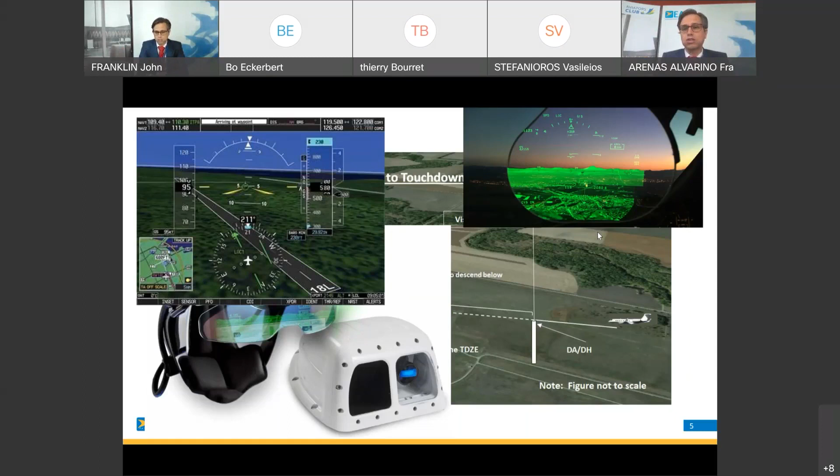But we are receiving applications of new technologies every day, with microwave sensors instead of infrared. We are also receiving a lot of applications regarding synthetic vision systems, etc. So our idea was, in a nutshell, to have in the AWO project a total system approach.

From that moment, we thought it was important to combine in a single rulemaking task all the domains of EASA, starting with air operations, but also piloting and pilot training through our colleagues in flight crew licensing, also aerodrome infrastructure, which plays a significant role in all-weather operations, and finally initial airworthiness certification, which enables the original equipment manufacturers that put that technology into operation.

So again, our idea was to ensure a total system approach. At that time, Marcel Compare, who is now retired and is here, started this project, along with Willie Siegel, and then I took over this project management 3 or 4 years ago, and since then we continue this idea of the total system approach.

That means we changed slightly the approach. Originally, in the current regulatory framework, we had very prescriptive implementing rules with very prescriptive ops rules, in which, for example, the enhanced flight vision system was only crediting one-third of the visibility. Those kinds of rules are being removed and pushed into certification.

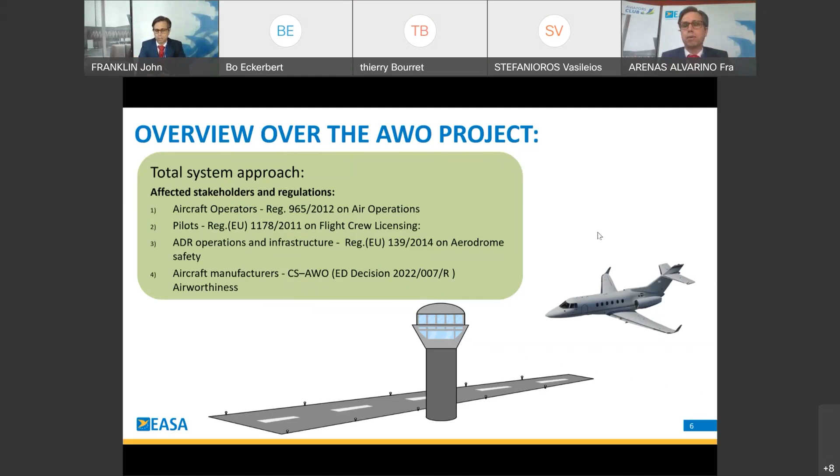At the same time, we do that in the same way with aerodromes, creating a regulatory framework that, on a voluntary basis, allows the aerodrome operator to introduce new technologies, while in ops, again, there's no prescriptive limitation. So the technologies implemented at aerodrome level can automatically be used by the airlines.

So let's talk a little bit more about what we mean by performance-based regulation and total system approach. Performance-based regulation means that the safety objective should be in the implementing rule, and it should be technology neutral, technology agnostic, and the technical requirements should be in the soft law.

Today, you see in the regulation that we have, for example, technology-specific terms like ILS, GLS, or EFVS. All of them are in the implementing rule, and therefore impose a limitation and a prescription in terms of technology.

So the new regulatory framework has no technology description at the implementing rule level, meaning that you will now see in the new regulation the term XLS, which means a landing system that is not bound to a specific technology. And then later on in the AMC, you will see the technology referenced, the ILS, the GLS, the EFVS, etc. Therefore, with this idea in mind, we assess the combination of risk.

For that, you can see in the concept paper of the all-weather operation a very detailed risk assessment that we did together with the concept paper. You can go to the EASA website, look for the 2015 terms of reference, and you will see the concept paper and the idea behind it, with a very detailed risk assessment.

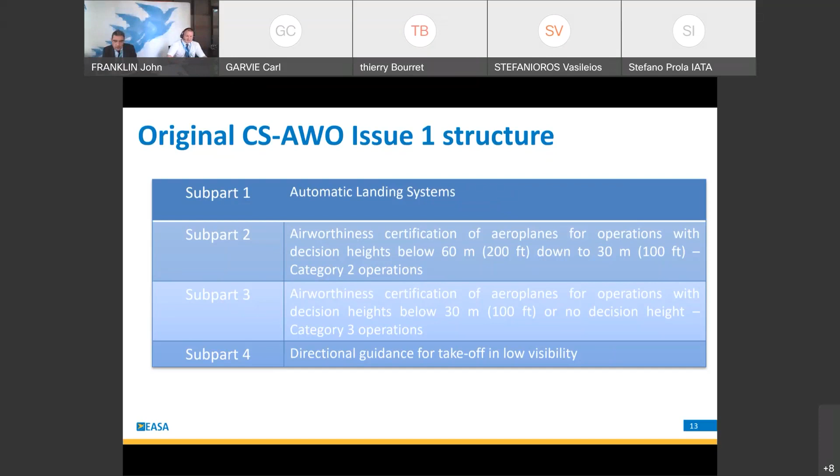As Francesco mentioned, we wanted to be more technology agnostic and allow for updates to technology in the future, so we completely restructured the CS into different subparts. In subpart A, we've extracted all of the technology dependent elements and put them into a subpart which we've called enabling equipment. As technology comes on board, we can update this subpart and add different sections or amend them as necessary. For example, we have the original automatic landing systems, but we've also added HUDs, enhanced flight vision systems, synthetic vision guidance systems, and combined vision systems.

Now in subpart B, you'll see this is where we've put the performance-based elements, so there's no technology focus within subpart B. It provides you the performance requirements for the systems. At section 1 we have Cat 1, section 2 we have SA Cat 1 which is new, section 3 we have Cat 2, section 4 we have Cat 3, and section 5 we have reduced visibility for operational credits.

And in subpart C, we have retained the takeoff operations in low visibility. So you can see in this way, we're able to very dynamically update the CS as new technology comes on board, but retain the performance requirements within subpart B and have the more prescriptive parts in AMC.

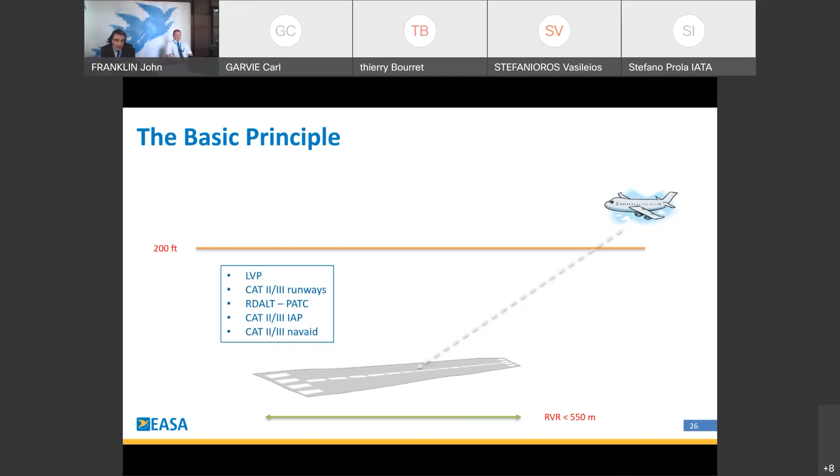There are additional requirements about the radio altimeter, which also requires precision approach terrain charts, Cat 2 instrument approach, Cat 2 or 3 instrument approach procedures, and Cat 2, 3 navigation aids. And this is the basic principle.

Now with the new concept, there is a slight change. The first one is the special authorization Cat 1 approach operation, where you see in the slide that we change the decision height, not anymore 200 feet, but 150 feet. So with the old concept, we are in the area where low visibility procedures are required.

For those familiar with Annex 14 and with the EASA certification specifications, we know that the obstacle-free zone, for example, is a recommendation for Cat 1 runways and is required for Cat 2, Cat 3 runways. So thinking the same way, we said: if we are below 200 feet, then we need an obstacle-free zone. We also need a Cat 1 instrument approach procedure, but the decision height, the OCH, should not be 200 feet, but should be 150 feet because you go further down.

And the ILS - well, this requirement is coming from air operations. So you need to have an unrestricted ILS, which is not offset, with a glide path of 3 degrees, although some deviations are allowed based on assessments conducted by the air operators.

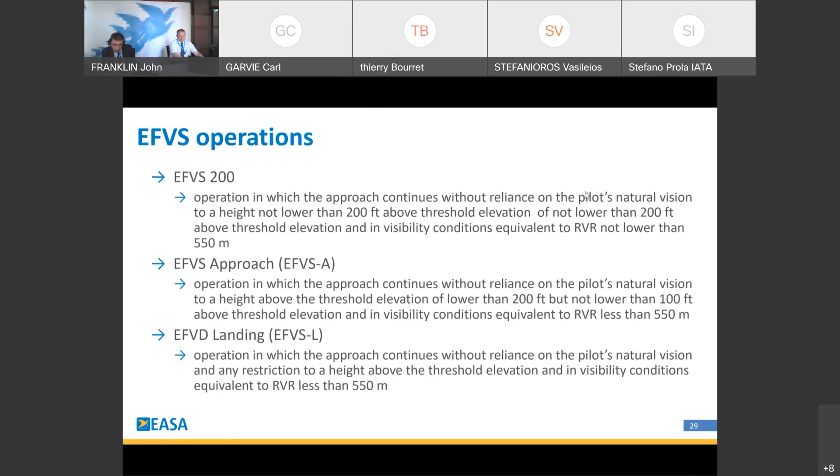And the requirements are, you can see them on the slide.

So for the EFVS 200, you need an instrument approach procedure, which is at least a non-precision approach. So you have only lateral guidance, but you are not allowed to have a final approach track more than a maximum of 3 degrees from the extended center line of the runway. And you need either an obstacle-free zone or the VSS is not penetrated. And of course, an instrument departure procedure is established.

On the EFVS approach, well, we need similar requirements. We need a straight-in instrument approach procedure. Again, the requirements for the obstacle-free zone or the penetration of the visual segment surface. We need touchdown zone RVR, low visibility procedures, because we are going down to below 200 feet, and Cat 2, Cat 3 switchover times.

And to land, it's what we require for the approach, plus that we need the type A chart and a precision approach terrain chart. And these requirements are coming, as I said, from air operations and from the certification.

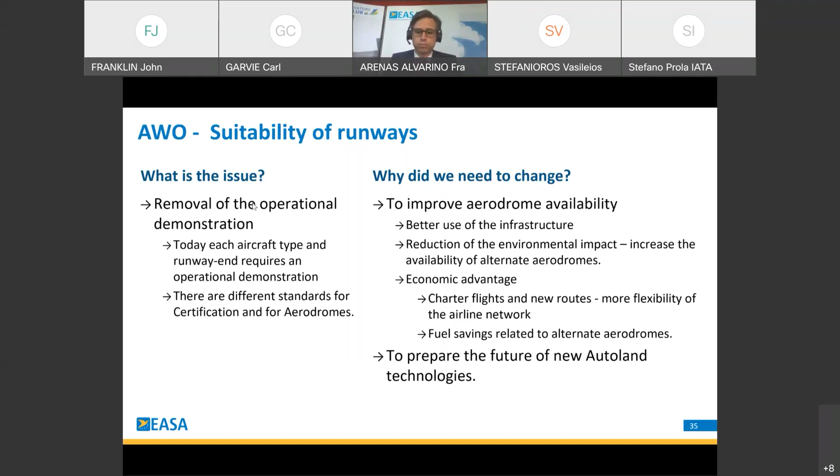So let's go into a little more detail on the suitability of runways. We know that 90% of runways today - we did a study and in Europe it's 95, but let's take a round figure of 90% across the world - the new CS issue 2, and the assumptions of certification in accordance with CS issue 1 and 2, are within that framework. That means we can accept that for 90% of runways, with a documentation check, the airline could operate automatically into that aerodrome. So what are we going to do about the other 10%?

There are several steps, but the first idea is that if you are already operating to an aerodrome and it is safe to operate, you can use that operational data to confirm and credit the fact that you can fly into that aerodrome. So that will be the first case.

If you don't have operational data because it's a new airport, a new route, or a new type certificate, then subject to manufacturer statement, Airbus, Boeing, or Embraer could say that this Airbus is equivalent to that other Airbus, and exchange operational data between models, from a 330 to a 380, from a 330 to a 320, etc. We also allow the use of computer simulations or manufacturer full flight simulators, but fundamentally computer simulations are all under the manufacturer. And then if nothing works, it will be an operational demonstration. We estimate that the operational demonstration with this new regulatory framework will be minimal.

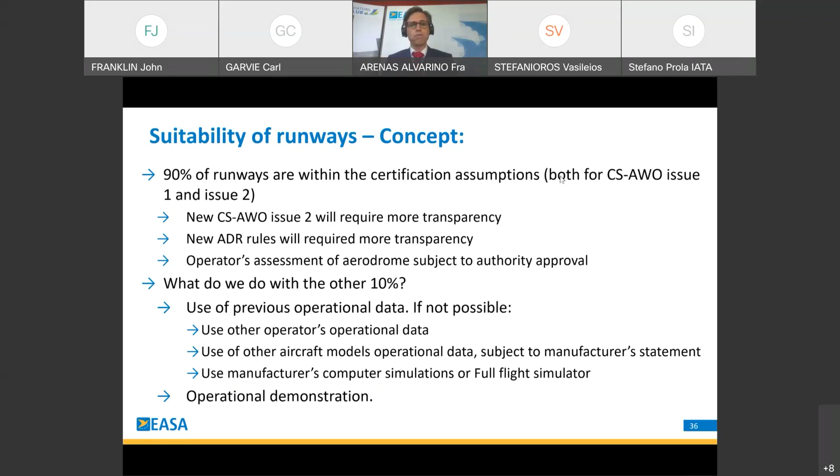So in a nutshell, the operator uses grandfathering rights and its own operational data, or uses other operators' operational data of the same aircraft, as is currently done today. This is nothing new, but as a new feature, another aircraft model is provided subject to approval from the manufacturer. If the grandfathering rights or existing operational data doesn't work, then we will do a desktop assessment in which CS issue 2 and CS issue 1 will give you most of the assumptions of the certification. Then that data can be compared with the AIP, with the airport, and a decision can be made at desktop, in a desktop assessment, whether the operation is safe.

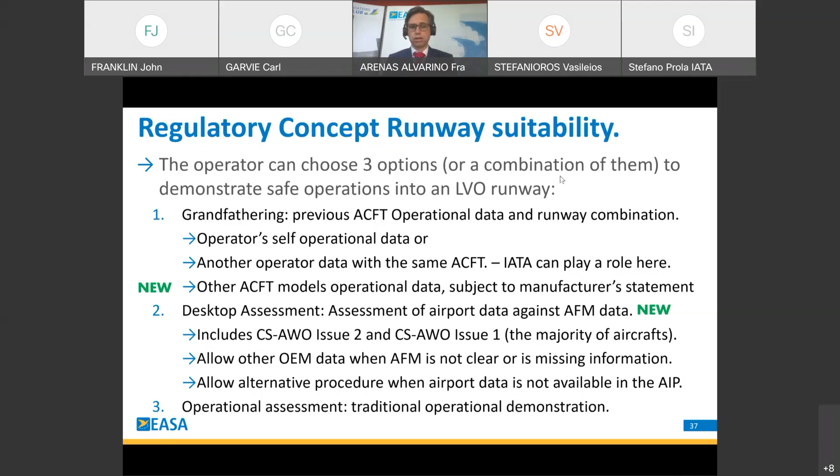If nothing of this works, then it will be an operational demonstration. So the desktop analysis is new, and we believe this is an improvement. The previous operational data is as per currently today, although we're going to increase it because we allow the possibility, subject to aircraft manufacturer statement, to use other aircraft types. Finally, the operational demonstration should be reduced due to the statements before.

We have today the people that help us develop the suitability of runways. Here are some of them. If you need to contact them, you can reach us through Slido or contact us, and we will pass your question to them.

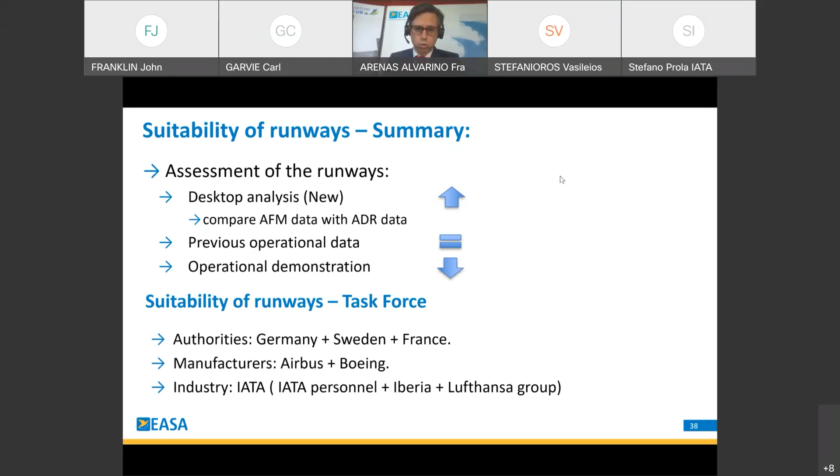Entry into force of this regulatory framework is on the 30th of October for ops, the 1st of August for aerodromes, and in CS-AWO it is already there. The publication of the AMC and GM will be done this quarter.

However, we have put in the ops community the latest AMCs and GMs for ops and FCL. They are available on the EASA website, in the EASA Ops community. We will also, after this webinar, include it in the website for this webinar. This is a very latest draft, so we hope you can start sharing this AMC and GM, although it's not official, in preparation for the publication we will do in June, end of June this year.

For the implementation, we're going to help you. We have selected today as the first webinar, but we will do another webinar on the 7th of September. This is tentative, but we will announce it formally at the end of this webinar. We are also planning one more webinar in October on all-weather operation. For those interested in fuel, there's going to be another on the 7th of July for fuel, another in the third week of September for fuel, and around the 26th of October for all-weather operation. Thank you very much, and we're going to have a break now.

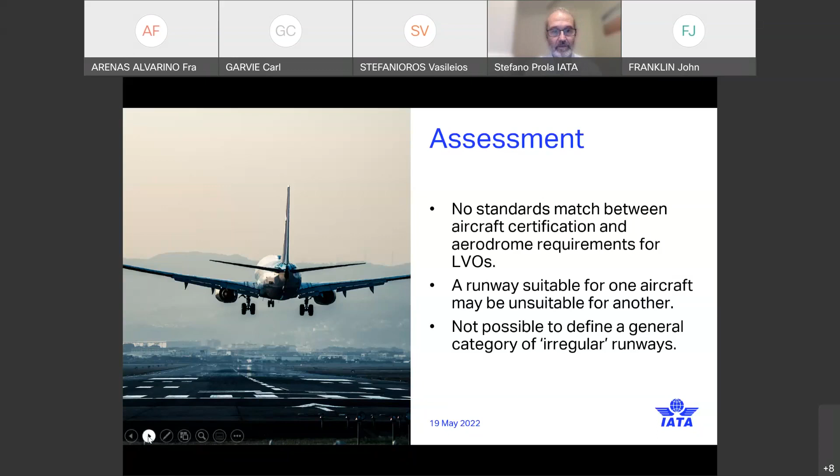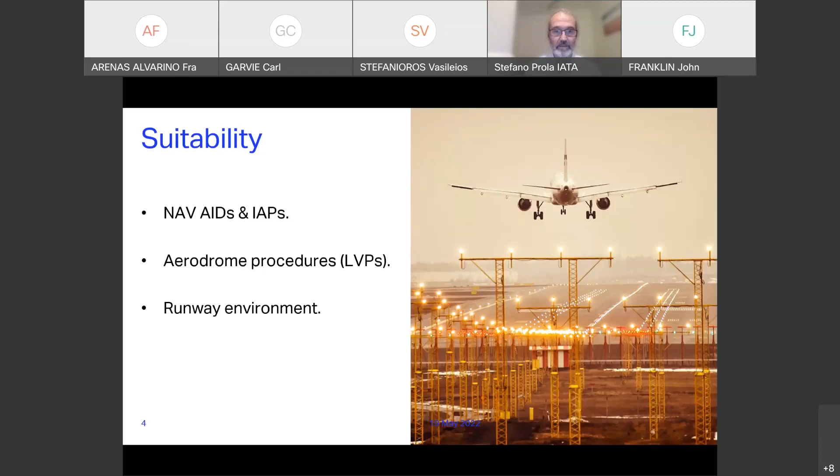For desktop assessment, you'll see in the SPA LVO 110 is the one requiring to fly only in suitable aerodromes, and AMC1 states the requirement for suitability of the aircraft and of the aircraft's intended operation at an aerodrome, including instrument flight procedures. So here suitability is intended not only for — we say suitability also includes the runway, the navigational aids, the instrumental procedures, the aerodrome procedures, and the runway environment.

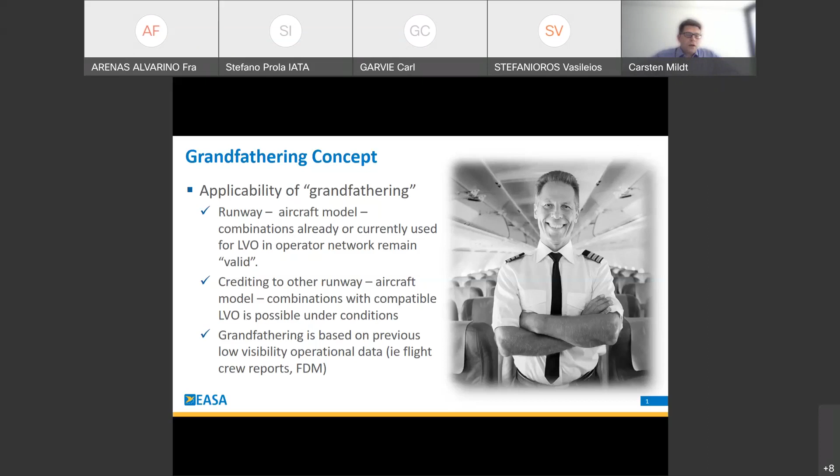A grandfather concept based on availability of data. Where can the data come from? What kind of data do we accept or do we have in mind? Well, it can be the data of the operator itself. Apparently there might be a situation in which the operation has ceased a couple of years ago to a specific runway, and the question is now, can we again put that aerodrome into our route manual, and maybe data can be used under the conditions set out here in the new regulation. But it's not only the data from the operator itself that the operator can use.

The operator can also use data from other operators. That might be interesting to a lot of airlines being organized in groups, operating similar aircraft types. I have seen a lot of applications on this.

The data could also come from the state of the aerodrome. We have this case, for example, in the US, where the FAA is providing suitability information. However, that's the only one I am aware of on the whole globe, but we don't want to miss it.

We put it in the new rules, so you can take advantage of that data being on the market. Data could also come, at least it is possible, from a competent authority issuing the operator the LVO approval, so it's the competent authority for that operator. And last but not least, data can, of course, always come from the type certificate holder of the aircraft, that is the manufacturer.

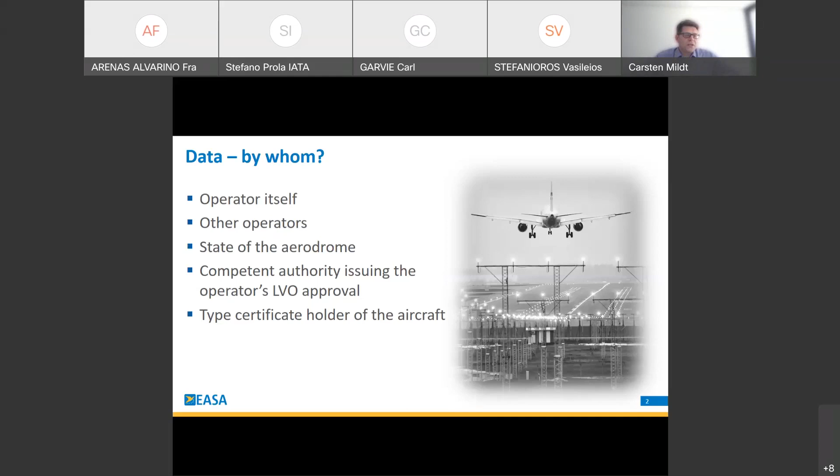Now, this is where the data you could use can come from. We think that's a pretty good list of all entities being able to make such a statement about suitability.

What can the data be used for? What are the conditions under which you can use the data? Well, first of all, it's all runway centric. So if you have data of operation to a specific runway, then this data is only good for that runway. That is the idea of grandfathering, the idea of previous operational data. So this is one of the restrictions you might have using the grandfathering data.

And it's not only that it is restricted to the runway, it is also restricted to the condition under which the last operation occurred, or under which the data has been collected. So if there are any changes to the runway itself, to the environment of the runway, or even the navigation facility, you would have to assess. We don't say it's impossible to use it, but you would have to assess these changing conditions from the time where you collected the data to the time when you used the data for other purposes. That's the first idea.

The second idea is, of course, low visibility operation is not just a runway, it's a collection of equipment being used, procedures being used. So the data you have collected and the operation you're looking to use it for need to be compatible. I'll show you a little bit about this in the next slide, but you need to have a certain compatibility between the operations from which you collected the data and the operation you want to use the data for.

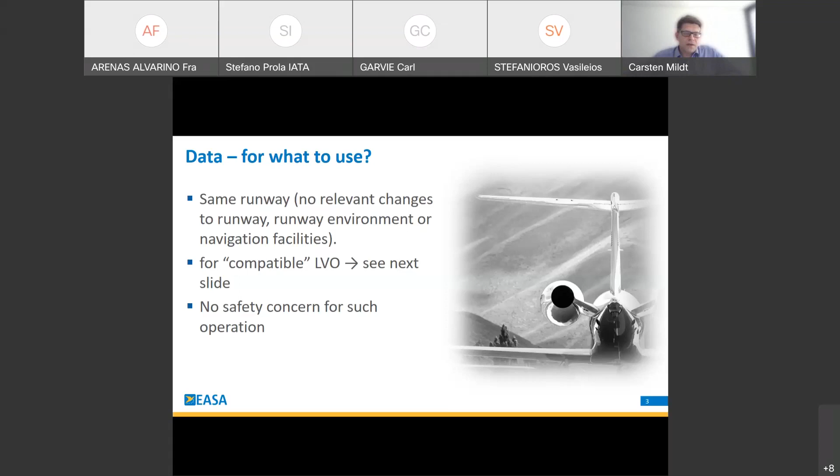And I chose some examples that might be of interest for maybe the greater part of the audience, because they're the operations which are presently, at least to my understanding, the most interesting ones. So let's just quickly look at the table.

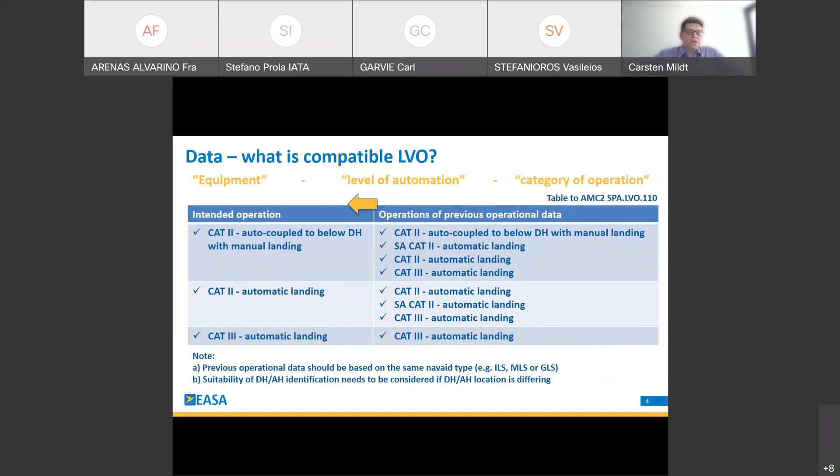The last aspect is what can we credit the data we have to, what aircraft can we credit? We have enabled this to be more permissive, so it's not only restricted to the very same aircraft. The new rules will allow a credit within the make and model. So for example, you would have an Airbus 321 of a specific series, and you can credit this operation to the specific runway for all other aircraft in the A320 model.

Same goes with the 737. If you have MAX data on the MAX, you can credit it to all series aircraft in the 737 model, unless the entity providing the data puts further restrictions on it. That could be the state providing data, the TC holder, or the other operator could also say they don't want you to use that for that type of operation, they want to restrict that. So it's possible you'd have such restrictions, but as a basic understanding, it gives you the possibility to enhance your operation within the model.

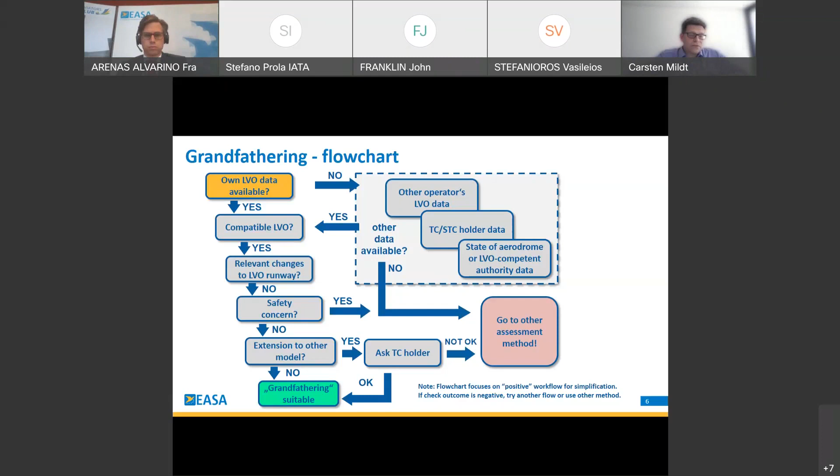So this is a recapitulation of how to use the data. Thank you for your attention, and over to the next speaker.

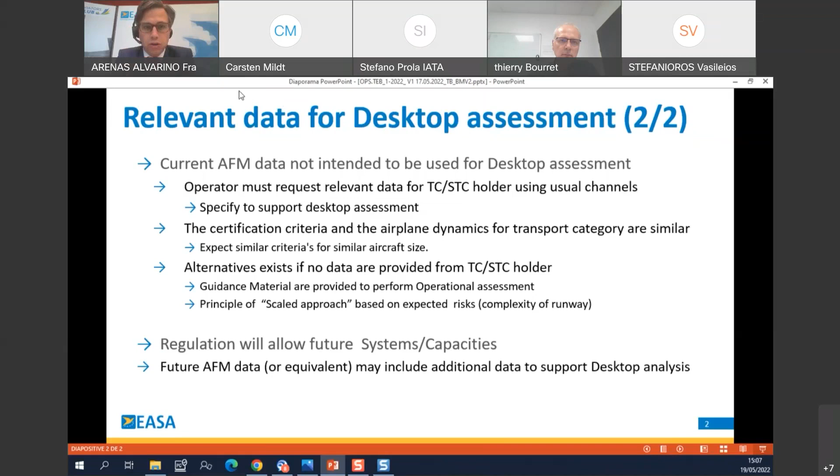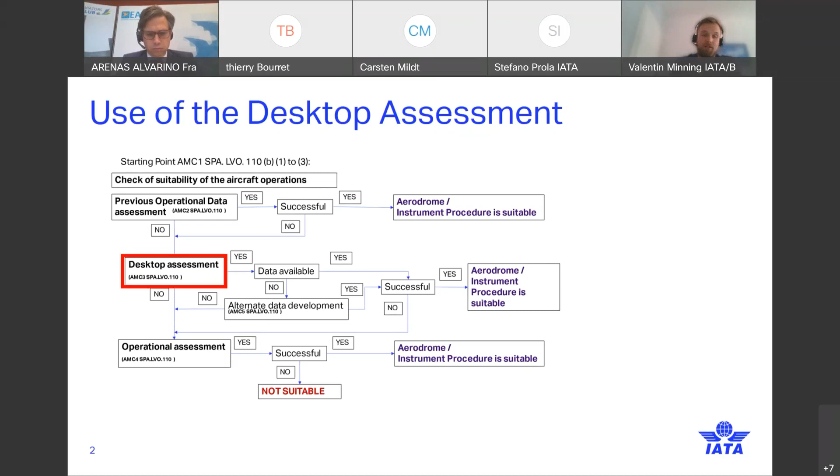So for the desktop assessment, I will provide several examples on how it can be carried out. I will focus mainly or solely on the pre-threshold terrain assessment and the landing system assessment area. These are two aspects that will be new, and I think most operators will be doing it for the first time, so it's a good idea to focus on these two key aspects of the desktop assessment.

As Thierry mentioned before, the current AFM do not contain all the relevant data you may need for your desktop assessment. So we contacted Airbus for our A300 and A330 fleet to provide additional data, and they gladly delivered it to us. That's why my examples will be based on our Airbus A300 and A330. It's interesting because these two aircraft types have significant differences, as the A300 is pre-CS-AWO certified and the A330 is CS-AWO certified. I will come to that at a later stage.

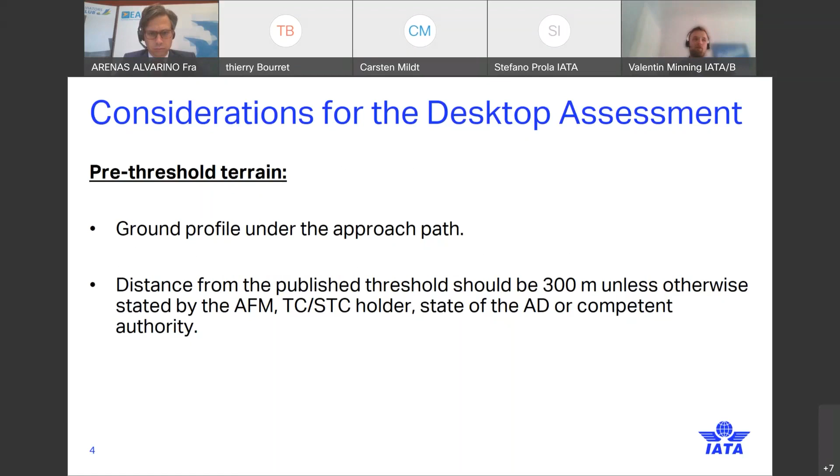Let's start with the two considerations I was talking about for the desktop assessment. You have the pre-threshold terrain, which is kind of self-explaining by the name. It's the ground profile under the approach path up to the runway threshold. The distance you have to consider for your assessment should usually be 300 meters, unless otherwise stated by AFM, the TC/STC, the state of aerodrome, or competent authority.

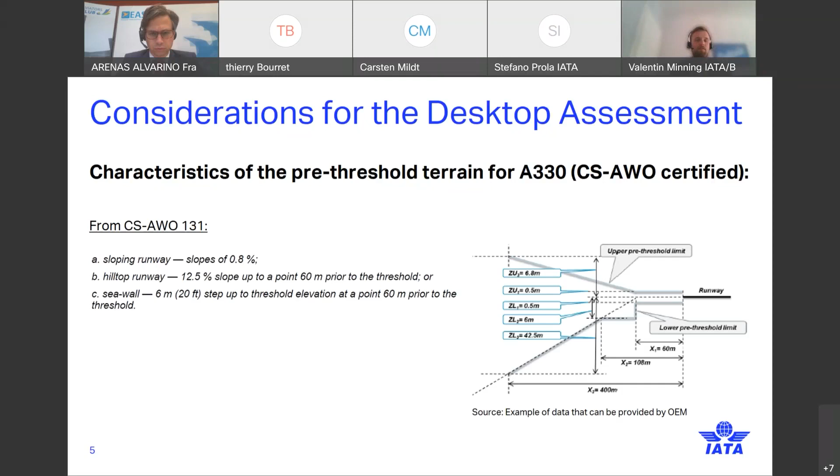Let's go directly to an example for the pre-threshold terrain criteria for an Airbus A330, which is CS-AWO certified. I extracted a part from CS-AWO 131 about considerations for the certification specifications of a runway. With this criteria given, Airbus developed a cone defining an upper and lower pre-threshold limit of your runway. This is an example of data that can be provided by the STC holder or manufacturer, in this case Airbus. It's a really nice example in my eyes because you have a very clear and detailed display of the limits you have to fulfill. With this, you can directly go into your desktop analysis for the pre-threshold terrain.

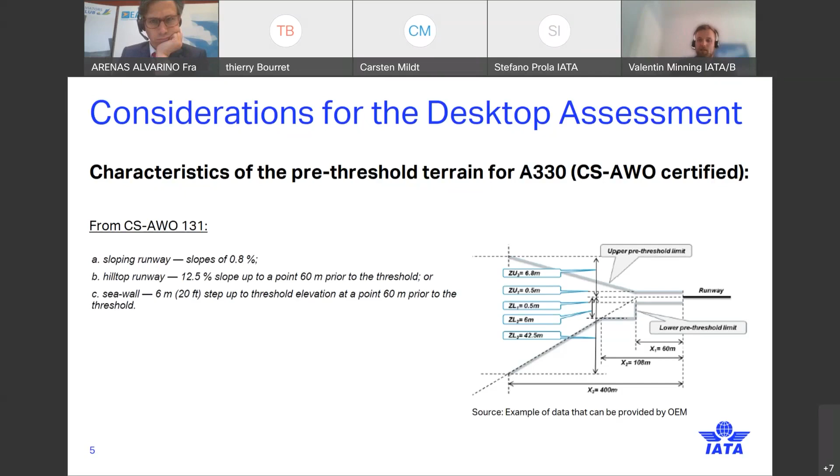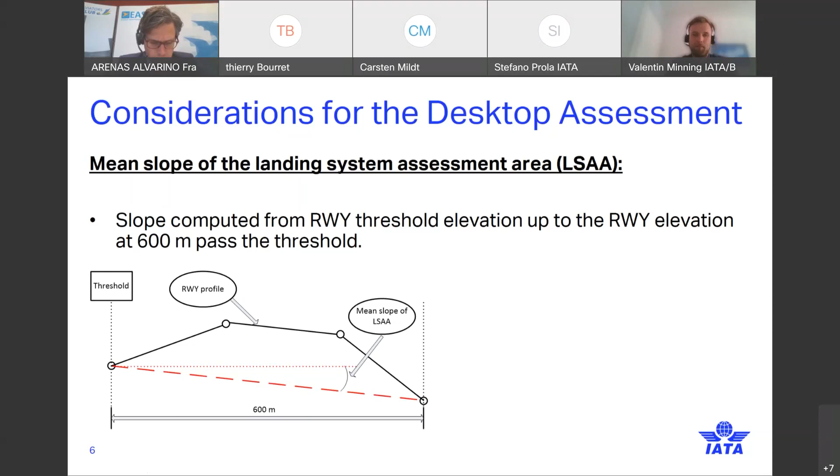Airport data to be used for the assessment: the primary source for the pre-threshold terrain is, of course, the precision approach terrain chart. In there you usually have the terrain from at least 900 meters up to the threshold, which fits the criteria you need to consider for the pre-threshold terrain assessment. There are also alternative ways to gather this information - for example, you can use your own FDM data from manual landings performed on this respective runway. It's a possibility you can use, but the primary source, as mentioned, should be the precision approach terrain chart. For the assessment of the landing system assessment area, it's quite obvious that the aerodrome obstacle chart is the primary source here, because it has all the characteristics and variations of your runway and runway slopes important for the assessment area.

Just one piece of advice: some states that publish aerodrome obstacle charts may include more detailed information about runway slopes or runway characteristics in their AIP text part. So it's definitely worth checking this out, because sometimes we have more information there. It happened to me for one or two states, but it's worth a shot.

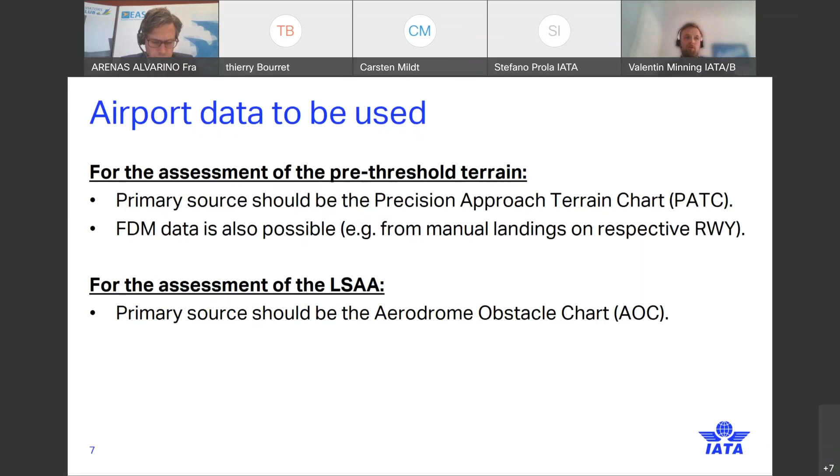So the pre-threshold terrain assessment for an A330 - please keep in mind we're talking about an A330 here. What I did is transfer the cone shown before, provided by Airbus, to this example of a pre-threshold terrain. This is a very easy way to do it. As mentioned before, most runways will fit this criteria of CS-AWO certified aircraft. Airbus applies this criteria for all their fly-by-wire aircraft that are CS-AWO certified, so this would apply to an A320, 330, 340, 350. There's no difference here for the desktop assessment criteria for the pre-threshold terrain. In this case, it's clearly visible that the pre-threshold terrain is within the criteria, so the desktop assessment for the pre-threshold terrain is initially successful.

But we also need the landing system assessment area. There will be some examples in the following slides.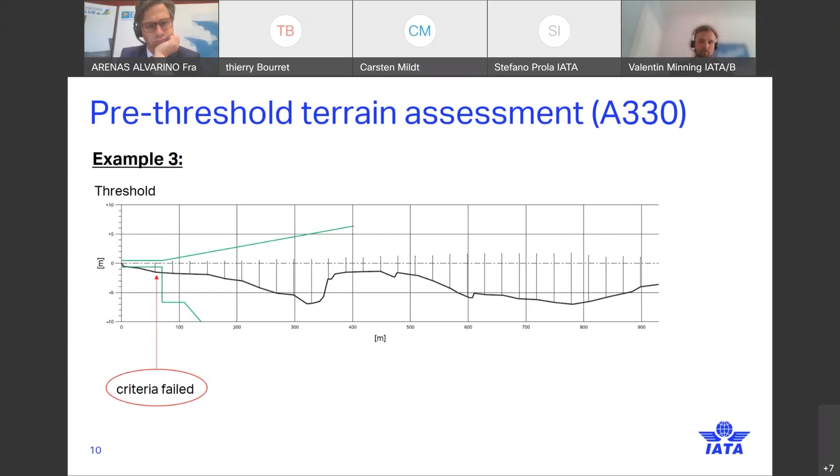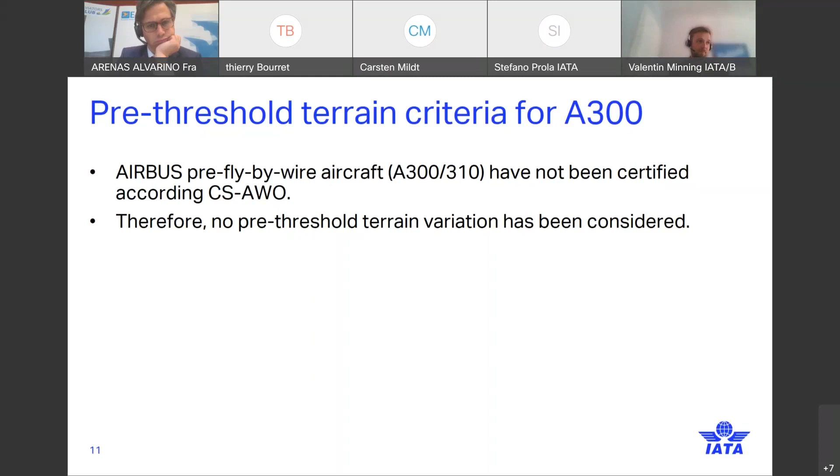Now, we may be a special operator as we also operate a good old aircraft, the A300, but still several operators do the same. It's an aircraft certified pre-CS-AWO, or not certified according to CS-AWO specifications, so you have different criteria for the pre-threshold terrain assessment.

As you might see now, most runways will fail this criteria for the A300. You only have 0.5 meter allowable variation, which in my eyes is due to the accuracy of the radio altimeter from 300 meters up to the threshold. So many runways will fail this criteria for an old aircraft like the A300.

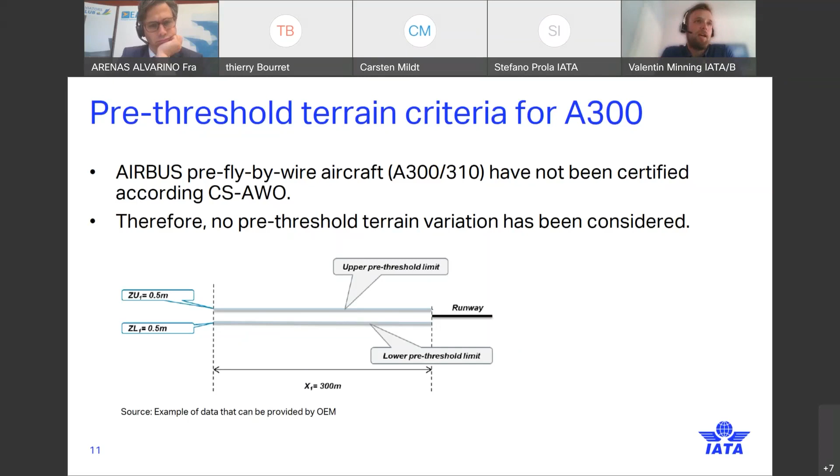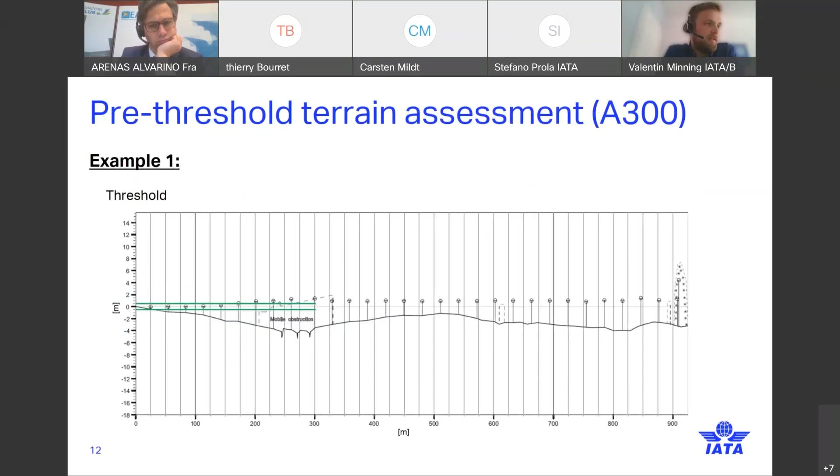Just a random example here - this would also fail the desktop assessment for an A300. However, I'll give you an outlook on how to continue at this stage for this example of an A300.

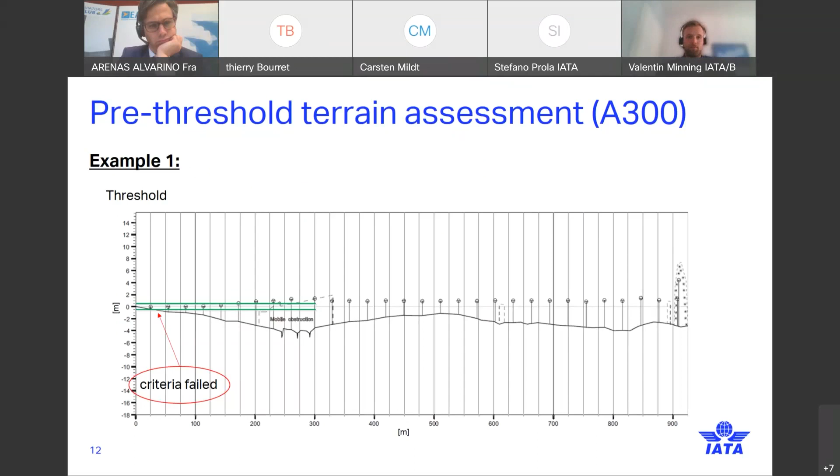Let's go to the assessment of the landing system assessment area slope for Airbus aircraft. This is applicable for both aircraft types, fly-by-wire or not, so CS-AWO certified or pre-CS-AWO certified - for the assessment of the landing system area you have no differences. Airbus clearly states the mean slope should not exceed a total of 0.8%, and - this will be new - the deviation of the runway profile line from the landing system assessment area mean slope should not exceed 1 meter.

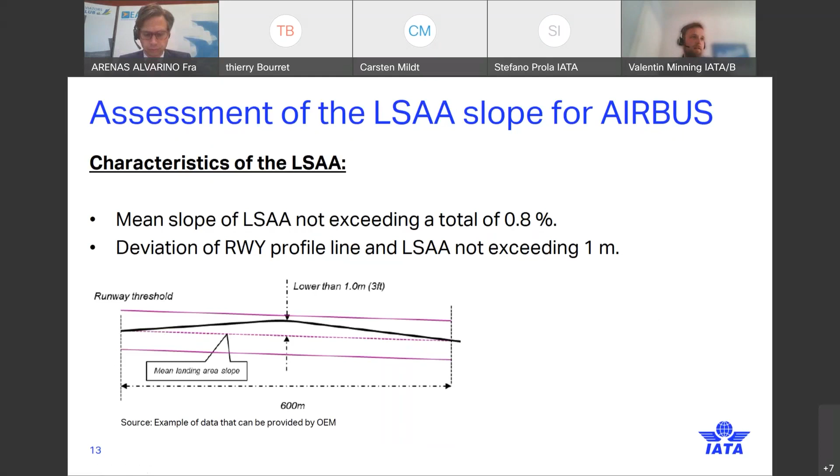So how does it look like? You have the connection line, the mean landing area slope, and the 1 meter plus and minus variation - your runway profile has to stay within these limits at any time, up to 600 meters. This is something you have to take into account when you assess the landing system assessment area slope for Airbus aircraft.

Let's go to an example. This is the characteristics of a runway with all the details you need. Not every AIP chart or information regarding the runway looks like this. This is a very nice example because you have all the information you need to assess the 600 meter area already given, so you don't have to use a scale or anything else. You can go directly into your analysis.

The consideration always starts from the runway threshold. In this case, it's 2.44 meters for runway 06 right. The displayed elevation of the respective slope changes and the distance between them can be used to calculate the mean slope of the landing system assessment area.

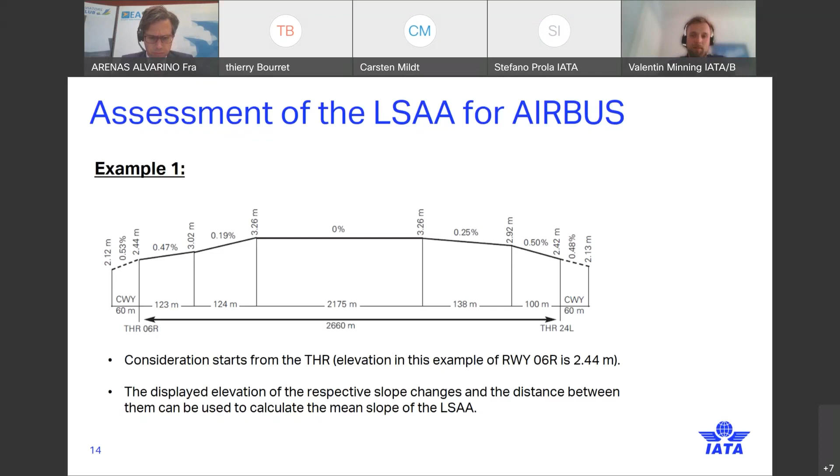There's a bit of work you have to do, a bit of calculation, but it's possible, and you can also basically use Excel to do it. That's how I did it, for example. You can really display these slope characteristics of the runway into Excel up to 600 meters. And in this case, you can calculate your mean landing slope, which is 0.14% in this case. And you can clearly see that the runway profile stays within the ±1 meter limits at any time.

Here, the runway profile line, the mean slope of the landing system assessment area, and the two maximum deviation lines define the area which the ground profile may not extend.

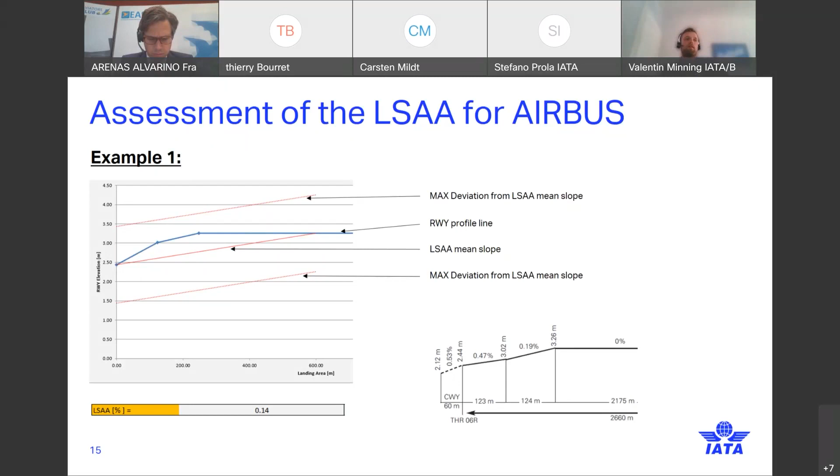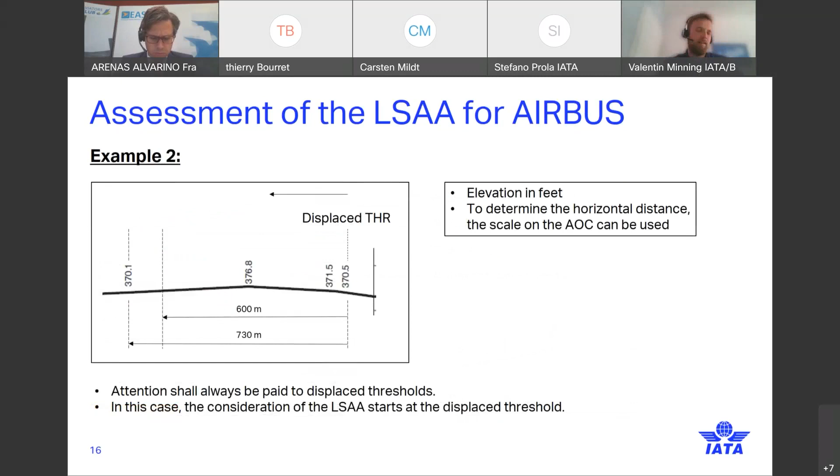I have a second example, because I wanted to show you an example where this criteria might fail. So it's also a nice example. Please always keep in mind, in case of a displaced threshold, you start your consideration always at the displaced threshold. So please keep that in mind and double check that at any time you are making a desktop assessment.

So let's have a look. We display the criteria or the characteristics into our Excel file, let's say. You'll see that the deviation from the runway profile line from the LSAA slope fails, is more than 1 meter. And although the overall slope is roughly 0.1%, the Airbus criteria for the deviation is hurt. So this would mean that your desktop assessment for the slope failed.

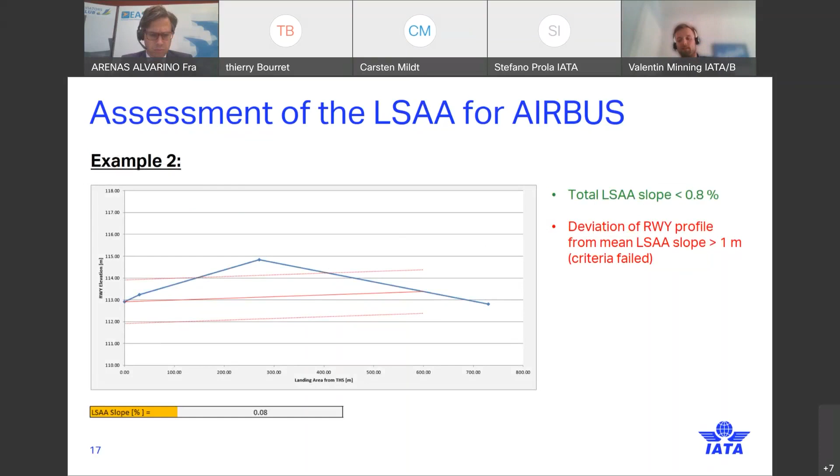As I mentioned before, if either the pre-threshold terrain analysis or the slope analysis fails, you can still do the operational assessment. As Thierry mentioned also before, it's more detailed, and there's more complexity in terms of the consideration, how many approaches you would need for a certain runway, and in which conditions they should take place. So it's a very clear guidance in the AMC4. It will be for the evaluation of a runway's complexity and to determine your number of flights and the conditions they should take place. So the pre-threshold terrain and the slope of the landing system assessment area will define the complexity of the runway.

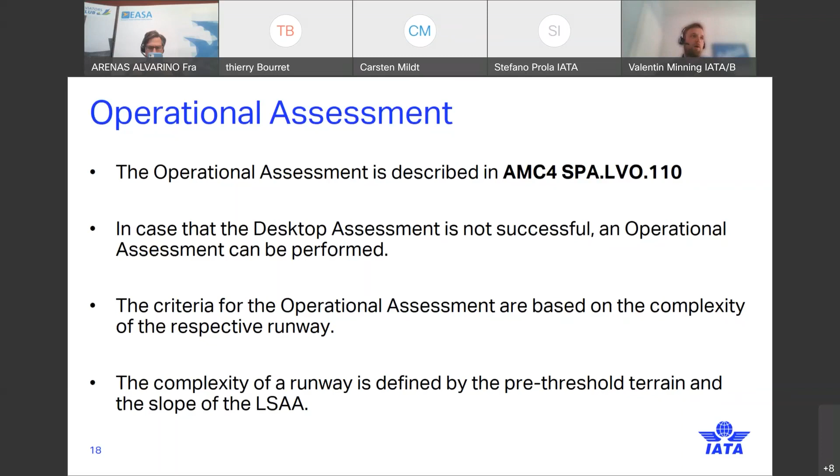But as I mentioned, this will be a key point or a focus on the next webinar. I would just give you a first insight for two examples I mentioned before, how you would proceed after the desktop assessment failed. So let's go back to our first example for the A300, where the pre-threshold terrain criteria were not met and therefore the desktop assessment failed. So you remember this, of course.

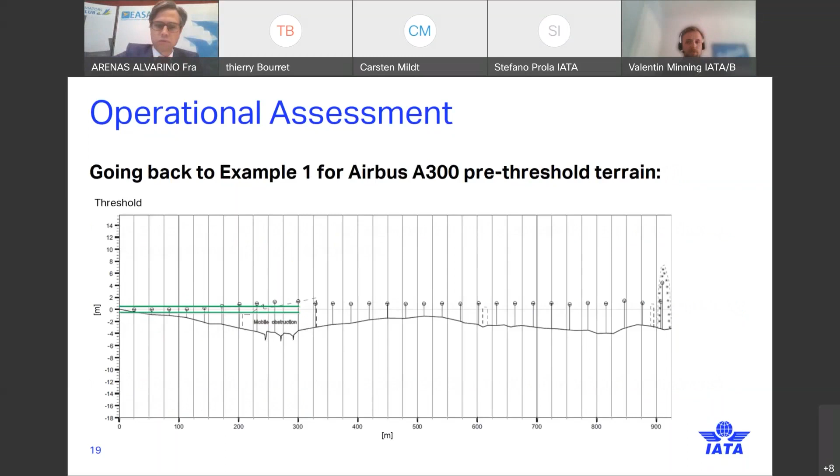I will present you an extract of the criterias, how a runway complexity is described in the AMC4. So for the pre-threshold terrain criteria, this is for a so-called moderate runway. So you will have simple runway, moderate runway, complex, and very complex runway - 4 different categories. I will focus now on the moderate runway, which is defined for the pre-threshold terrain by a ±1 meter variation within the last 60 meters prior to the threshold, and up to 60 meters, a rising slope less than 7% or a moderate see wall not exceeding 3 meters.

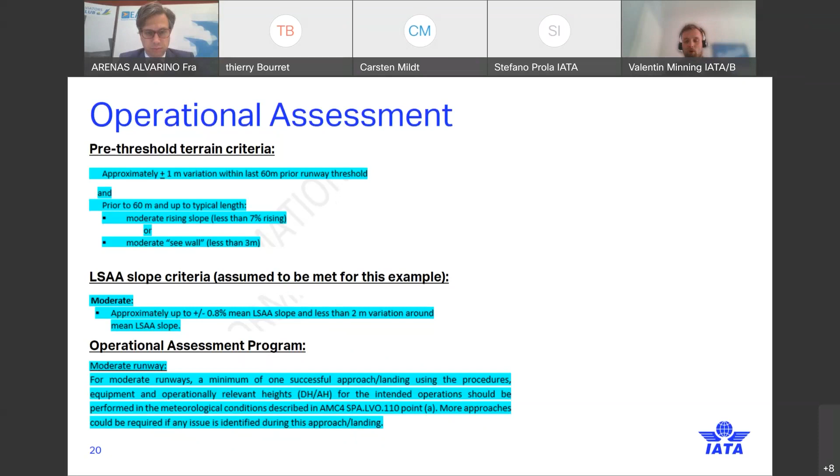For the slope criteria, it's pretty straightforward. You have the maximum allowable of ±0.8% of the total slope, and you have a less than 2 meter allowable variation around the mean LSAA slope. And the program that would be the result if you declare this runway or assess this runway as moderate will be one approach usually, in the intended operations in the meteorological conditions that will also be described in the AMC4.

So let's take this moderate runway cone I was talking about and apply that to the example for the A300. You see now this runway or pre-threshold terrain fits into these assumptions or criteria, meaning the pre-threshold terrain could be declared as moderate.

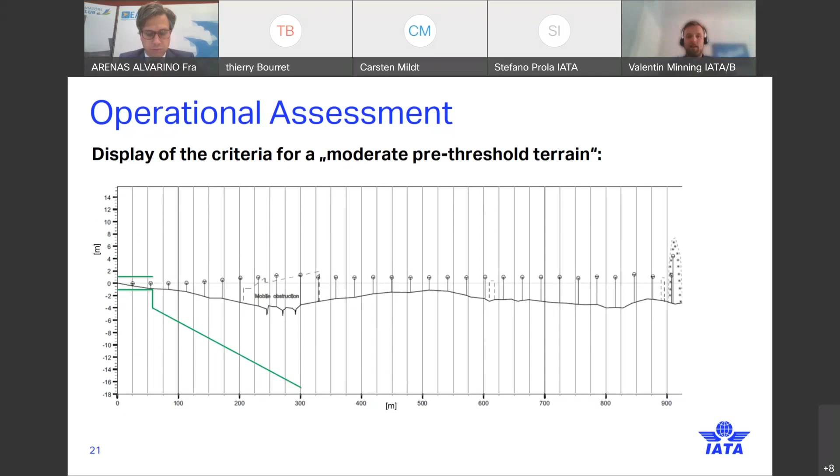Now let's go back to the landing system assessment area. Remember this example that failed our slope criteria because it exceeded the 1 meter deviation from the mean slope of the LSAA. So just to remind you, what are the criteria for a moderate slope? Plus minus 0.8% and less than 2 meter deviation from the mean landing system assessment area slope.

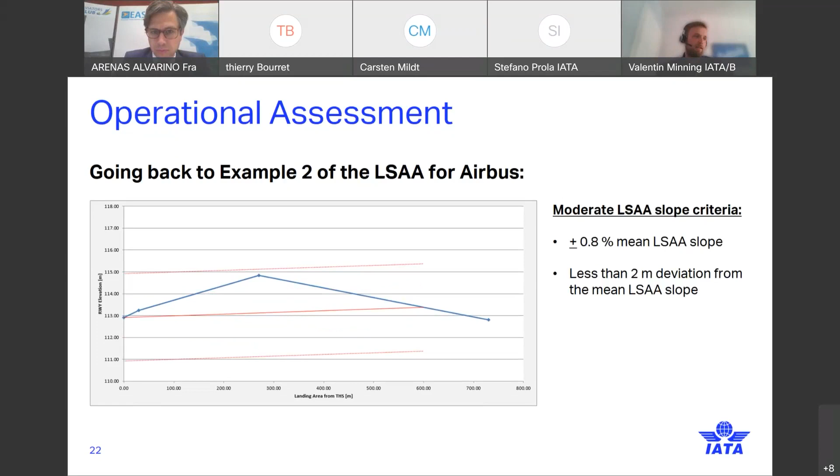Let's apply this here, and you will see that your assessment area of the runway stays within these limits, as your mean slope hasn't changed, but your deviation for the moderate runway is 2 meters, and you fulfill that, meaning you meet the criteria for a moderate runway.

If you combine, let's say, the pre-threshold terrain I was showing before and this slope for the same runway, you have the two criteria for moderate fulfilled, and then you have a moderate runway, meaning in this example that you only need one landing in Cat 1 or better weather conditions to prove your runway as suitable for your LVO.

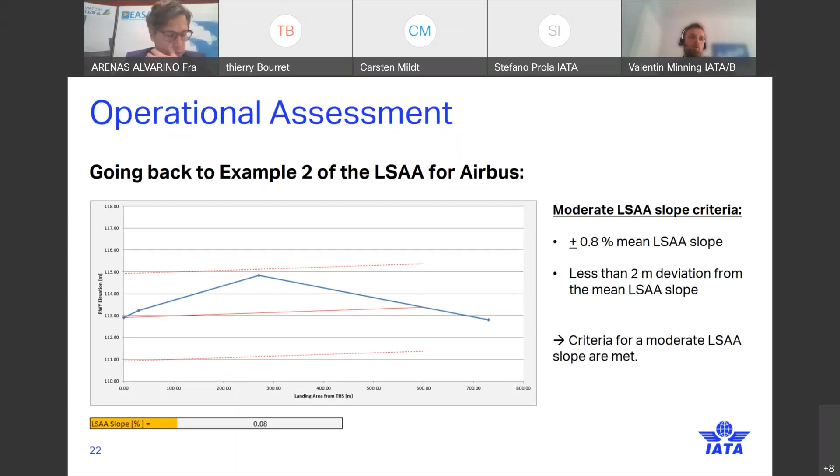So let's come to my conclusion. The desktop assessment, this is very important, compares aircraft data and runway characteristics to determine the suitability of a runway for LVO. For CS-AWO certified aircraft, most runways will have a positive outcome in the desktop assessment, and therefore you won't need any more landings in Cat 1 or better weather conditions, so you can directly go into your respective Cat 2 or 3 operation if the desktop assessment is successful.

Aircraft related data that you will require is AFM data completed by additional data from the TC or STC holder, the manufacturer in this case. It is a problem that the current AFM do not provide this data, but I encourage and advise you to really use the usual channels to your TC or STC holder of the respective aircraft to demand this additional data for the desktop assessment that you need.

The aerodrome data can be derived from the precision approach terrain charts and the aerodrome obstacle charts. As I mentioned before, there are alternate means you can also agree with your competent authority on, or you can use FDM data for the pre-threshold terrain. But usually, in most cases, you will need these two types of airport charts for your desktop assessment.

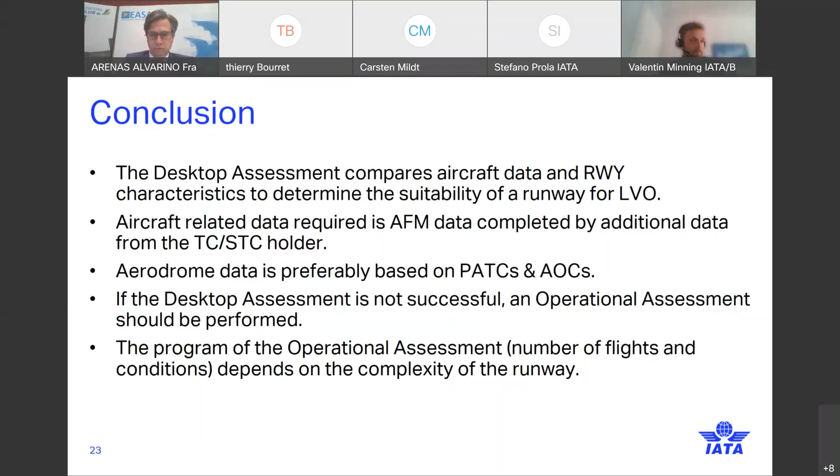So thank you very much for your attention. I know it was the last presentation and maybe a lot of things to take in. But this presentation will also be shared, and I invite all other operators to check their runways, to check their network, perform some desktop assessments as soon as you have the drafts of the AMCs available, and share your experience with that.